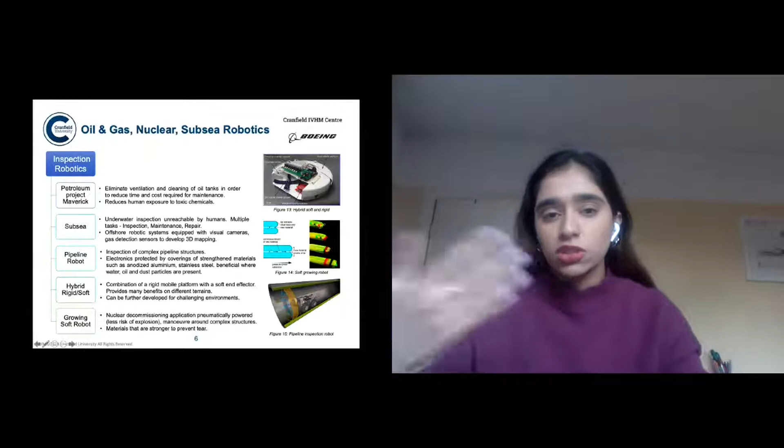So once I had completed this area, I looked more into the oil and gas industry and nuclear decommissioning, who have been developing robotic systems over the past many years. I think they are personally much more advanced when it comes to the application of robotic systems in hazardous confined environments. So I'm just giving some examples.

One of them was the petroleum project, where they had developed a robotic system that was able to be fully submerged in fuel itself, and they wanted to eliminate the process of ventilation of oil tanks and the cleaning process, so much more time is spent on inspection. A similar approach is applied to pipeline robotic systems as well.

One of the most trending topics right now is the use of soft robots, especially in nuclear decommissioning, where they have developed a flexible snake type of robot with the use of soft materials that is able to maneuver itself within confined, hazardous spaces, and because it's pneumatically powered, there's no risk of explosion, for example, because there isn't any sort of electrical components present because of the soft material.

And there have been other examples where robotic systems have been combined together, both rigid and soft, and that are dependent on each other when it comes to conducting inspections.

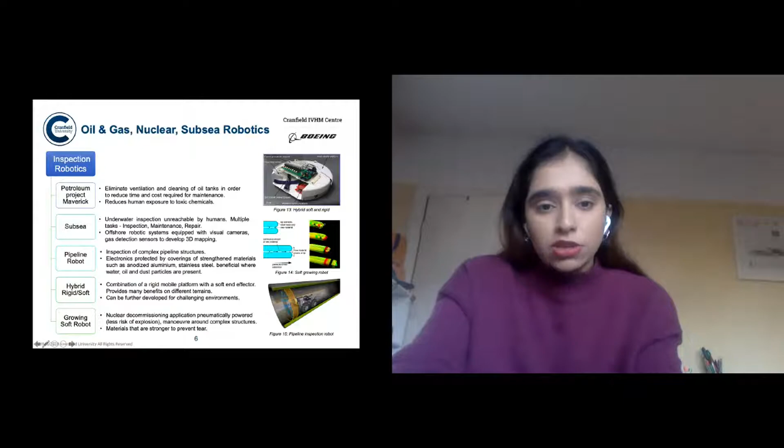So I separated my research into 4 key areas: hazardous environment, confined environment, the materials that would be required when developing a robotic system for a hazardous environment, and the type of inspection methods that you could implement into the robotic system - so either just a visual camera or the use of NDT equipment. With these 4 areas, I broke them down in relation to a fuel tank environment aspect.

So taking into consideration the parameters of jet fuel, which obviously gives off toxic vapor and is prone to explosion, there are different types of limits you have - your lower explosion limit or your flashpoint limit. So how could the electronic side be designed according to this, so there's no risk of explosion, for example? And when focusing on confined space, looking into the physical constraints of the fuel tank.

So how do you design the mobility of a robot to maneuver in a fuel tank itself? And what types of inspection equipment could you add onto the robot so it's quite small in size? It can maneuver in a confined space and conduct any sort of inspection.

And the types of materials. Materials separates into 2 areas. One would be the materials of the robotic system, and the second area would be the materials of the fuel tank, for example. So if it's a composite wing fuel tank, what types of defects would you be looking at?

Corrosion is probably more resistant when it comes to composite fuel tanks, so there may be other impact damages that may need to be detected.

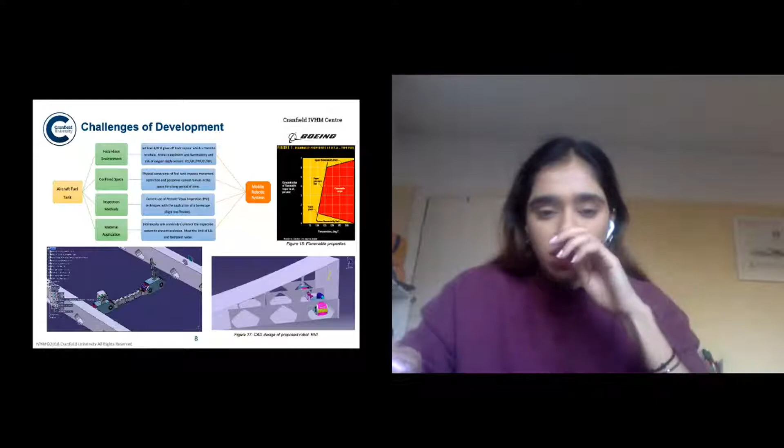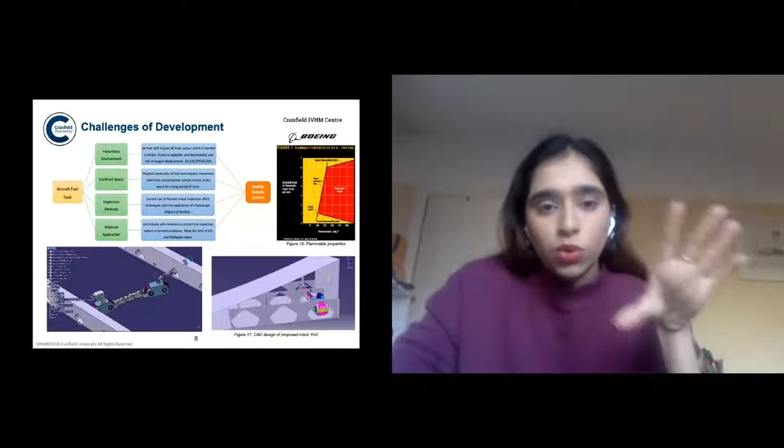So when it comes to the robotic side, I broke it down into two areas. One is the internal inspection, so what type of inspection method would I use? So I'm primarily focusing on just visual inspection.

I think NDT could be incorporated later on for further work, for example. I need to take into consideration the lighting because of the lack of visibility within such a confined space.

And the second area is the robotic system itself, so the types of mechanical components that would be required, sensors. So definitely have, for example, a gas detection sensor because you need to monitor the levels of gases in the fuel tank while it's in there.

And another thing to look into is the failure of the robotic system if it did fail. You wouldn't want a complete autonomous mobile robot in aircraft fuel tank, and if it failed, how would you retrieve it back, and what are the risks?

If the robot system was very small and it failed, how would you retrieve it back? You could simply just apply a tether to kind of overcome this issue.

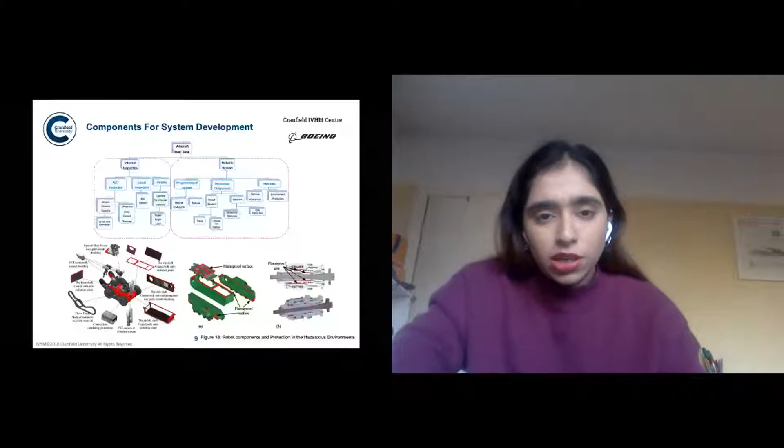So I just want to kind of finish off with the advantages of robotic application within a fuel tank. Obviously the exposure to the person conducting inspection to hazardous fumes is dangerous if it's not done properly. It's a very time-consuming process as well.

So maybe if we did apply a robotic system to such an environment, maybe parameters such as the lower explosion limit and the flash point limit could somehow be adjusted, so they might not have to be set to the same extent as when a human enters the fuel tank. Ventilation is definitely important, but maybe some parameters could be adjusted around the mobile robotic system.

The other benefit would be that disassembly of structures would not be required. You just simply have this robot system that could maneuver in these spaces and conduct inspection.

And flexibility in design. There's so many things you could do with a robotic system - you can add different types of sensors, make it much more advanced, have an autonomous robot system in place. And overall, it would reduce the downtime when it comes to maintenance, so it could be cost effective if implemented in the right way.

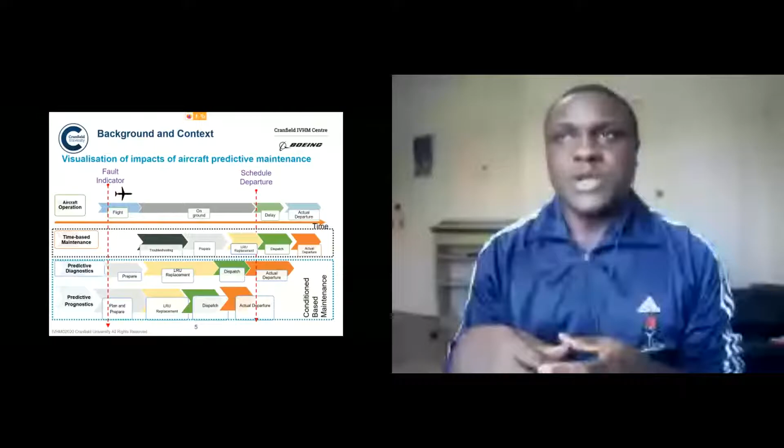Looking at maintenance of aircraft, there's what we call time-based maintenance, which is like corrective maintenance or preventive maintenance. In this type, when the fault is detected during the flight, the aircraft lands, then the engineers will carry out troubleshooting, determine the exact failure, and then the part will be ordered and replaced. We can see that this type of maintenance is prone to delay.

That takes us to what is called condition-based maintenance, in order to avoid such delay. In condition-based maintenance, there's a diagnostics approach whereby the system in the flight operation, if the fault is detected, gives the exact fault, so that when it lands, the aircraft would communicate with the engineer, so that the part will be available and be fixed. In that type of method, we will shorten the delay.

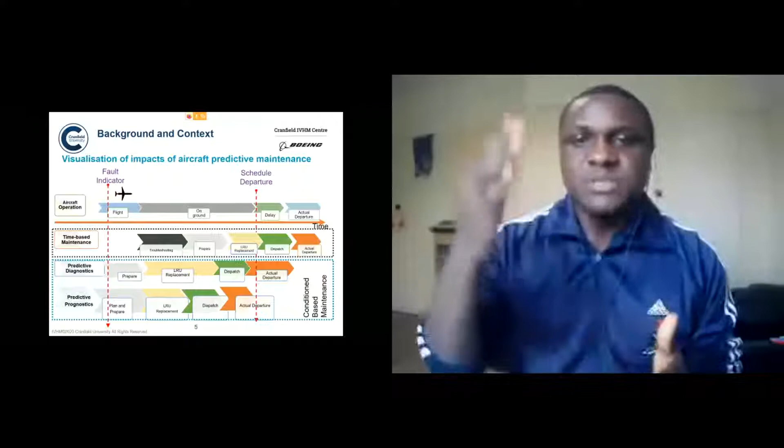But in order to further optimize this, there's what we call predictive maintenance, which will involve running a predictive model to predict this failure before time, so that before the aircraft even takes off from point A, you have already known it will fail in the next phase. So parts will be available, engineers will be ready, and when the aircraft lands, it will be fixed on time. The actual departure time will be the same as scheduled departure, and in that we are cutting the downtime. So this is where we're coming into the predictive model.

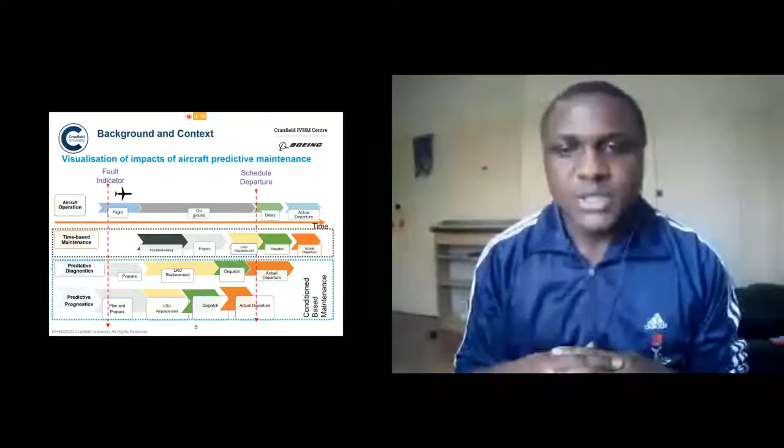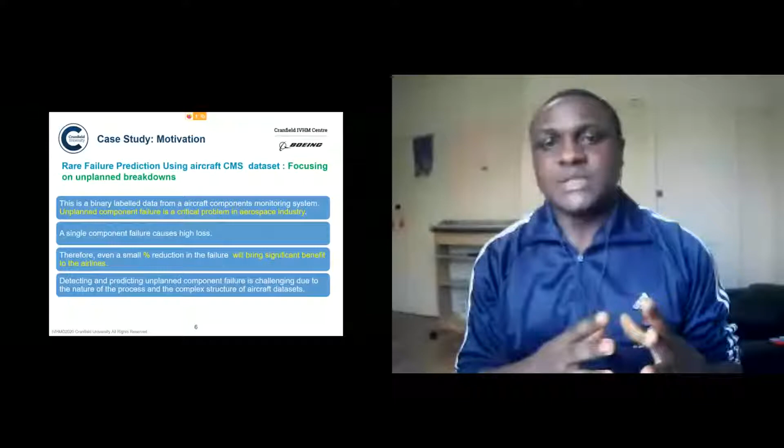In this work, the motivation is we use the data set from the aircraft, known as the central maintenance system data set. It's a data set that gives warning messages or failure messages from different subsystems in the aircraft. In this data set, it's heterogeneous data.

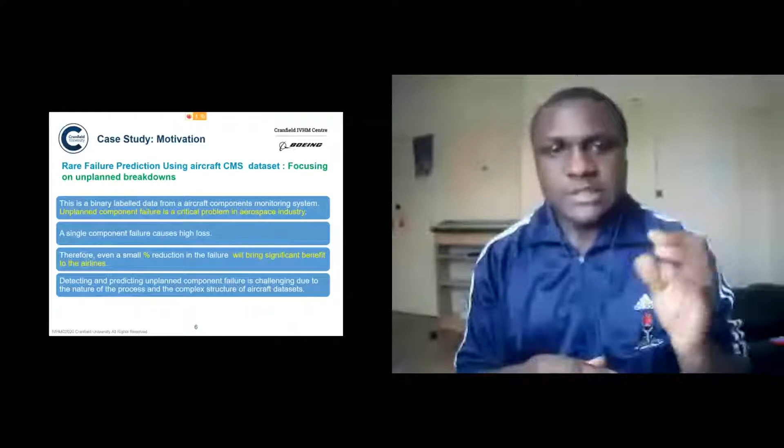It's not just numeric. One thing we target is we target the unplanned breakdowns. In maintenance, we have kind of scheduled time that maintenance is carried out, so there are failures that occur that are not planned. The reason why we focus on this type of failures is because of their importance. Companies are saying that those types of maintenance, though some don't often occur, but if they do, the cost is always high.

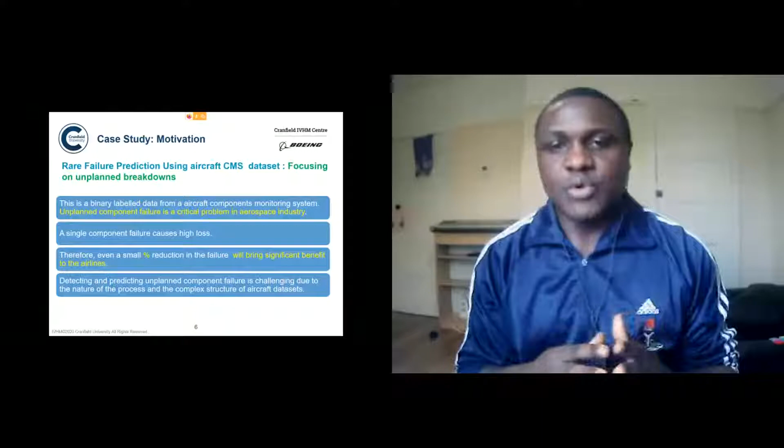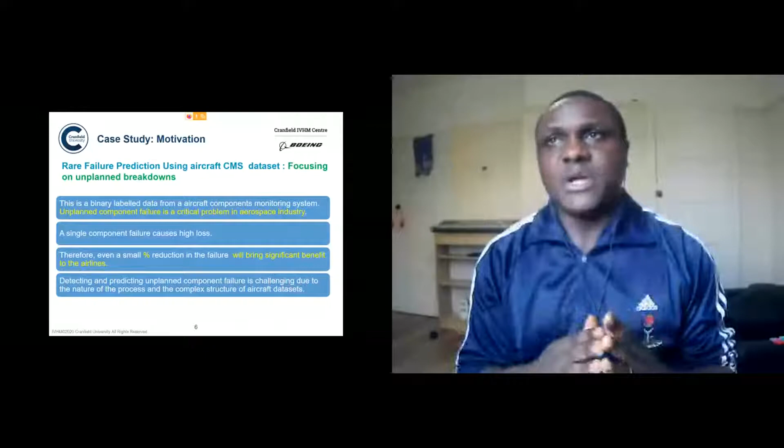So reduction in this type of failure, even to any percentage, will bring significant benefits to airlines. That is why we focus on this. And this type of failure in this data set is rare, there are few of them, and that makes the data highly imbalanced.

I wanted to show you how extreme this imbalance is. A normal imbalance is extreme here. We can see that the positive label, which is related to the unplanned breakdowns, is about 0.001%, while about 99.999% are the failure messages that do not relate to unplanned failures.

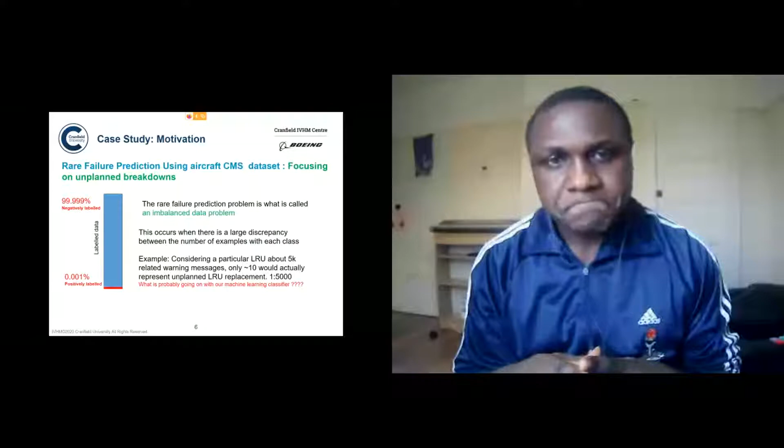Having that problem at hand, we decided to look at different solutions to this imbalance problem. Of course, there are different solutions that exist. We try to put them into three from the literature. There is a data level approach, whereby you try to sample this data set, either oversampling it or downsampling. In that case, they have some drawbacks.

If you are trying to oversample the data, you are adding new data points and altering the structure of the data. If you're trying to downsample it, you may be taking off some information data points. Then there is the algorithm level, where the standard learning algorithm is modified in some way in order to respond favorably to these classes during learning. And there is the hybrid approach, which involves combining one or two or more of these approaches to optimize or gain better performance. So we are actually looking at the hybrid approach.

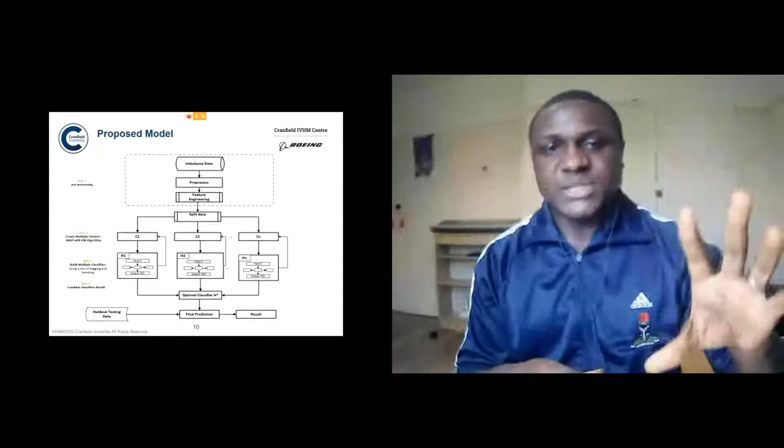Okay, so this is the structure of the proposed method that we implement. First of all, the first step is to pre-process the data. We did our feature engineering, as I've said. So now on the transformed data, we apply the mixed Gaussian process algorithm with EM.

It will cluster this data into different clusters, and then in each cluster we now apply the bagging and boosting method, and at the end, which is step 4, we combine this to get the optimal classifier. So our holdout data set, which is the testing data set, we now use on this classifier, and then we obtain the result. So this is what we implement.

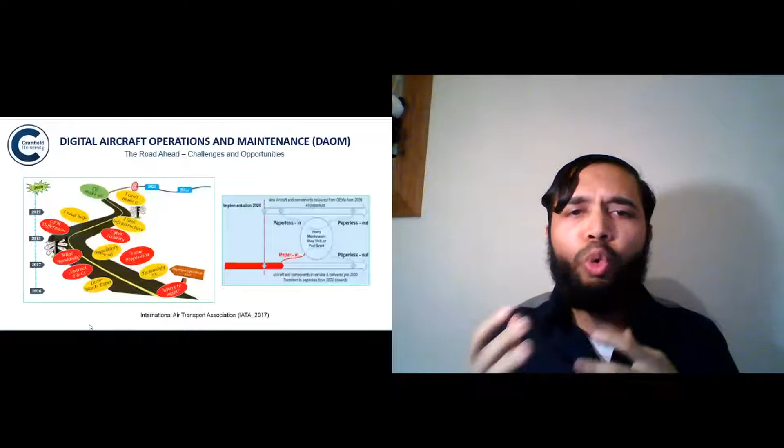In the last decade, there has been a lot of proponents of digital record keeping in the aviation industry. As we know, it's a very strict and complex industry in terms of standards. IATA, one of the big players representing over 80% of airlines in the industry, came up with a guideline on paperless aircraft operations and maintenance. The initial problem was that lessors, who merely own the aircraft and lease them out to airlines, were not sure about moving to digital records, as there were challenges with technology, no regulatory standards in place, and equipment manufacturers were worried about cybersecurity. The entire infrastructure in terms of data systems and interoperability was also a major challenge.

But so far, progress has been made. There have been technologies like RFID and e-signature that have really helped in this process. But going forward, we found out certain challenges that need to be tackled if digital aircraft operations and maintenance is to be achieved in a more effective and efficient way. The most important point in this slide is that all aircraft coming out from 2020 are expected to be paperless and in digital form in terms of records, and all existing aircraft that go into major or heavy maintenance are going to come out paperless from this year. This is a significant leap in the industry in terms of digitization, and that's why understanding the problems and challenges that come with this leap is important.

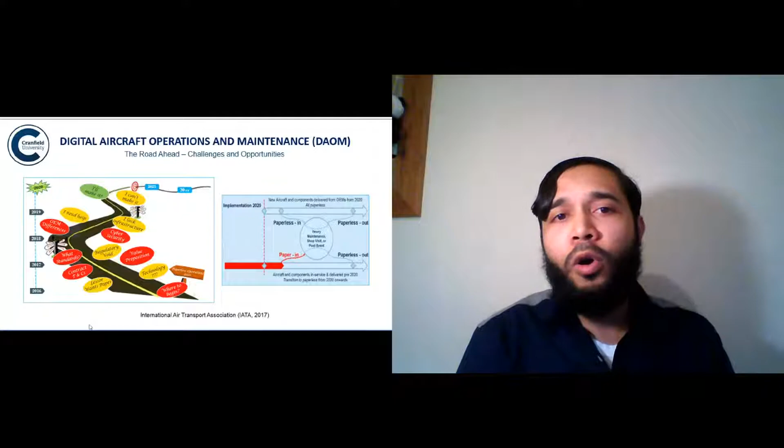From the context of this research, we found out that typically an aircraft will include about 11,000 to 20,000 papers in a year of operation, and this amounts to huge records when it comes to transfer of assets or lease returns.

Generally, an aircraft could cost 2.5 to 4.5 million in terms of actually auditing those records during the transfer, according to the International Bureau of Aviation. Airline aircraft maintenance consists of about 9% of the operational cost, which is about 69 billion. That is huge.

Another important point is that the International Bureau of Aviation came up with a report on challenges of delivery and redelivery, which points to the fact that 60% of the challenges when transferring assets and giving them back is on records. Why records? Because it is mainly on paper, and you have to go through months and months of records with experts to evaluate and audit them.

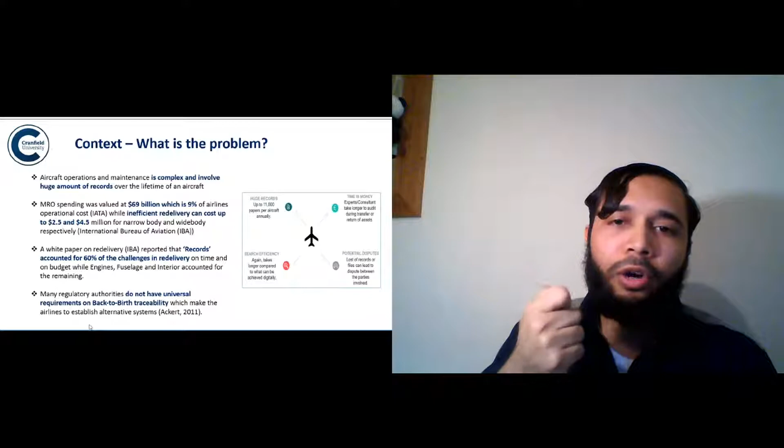Now, if by any chance a record is missing from an airline operator, the stakeholder, the lessor, or any of the MROs, it means that component, or the aircraft itself, decreases in value or is even not useful at all, because back-to-birth traceability cannot be established and nobody knows what happened between that period. That's why digital records are important.

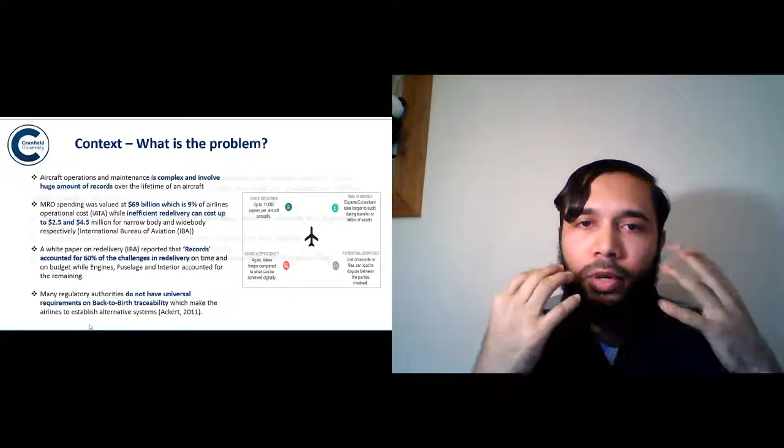There's another report from Cambridge that looks at the information perspective, the technology perspective, and four recommendations came out of it. Two of these are very critical in terms of information record keeping. The first is interoperability, which requires semantic software and cognitive systems, which I will discuss in depth throughout this paper. Secondly, is the development of frameworks and standards for data interoperability.

So again, we see the idea of data interoperability and heterogeneous data comes up a lot in the literature, a lot from the industry, talking about how this challenge affects the industry.

We have outlined four main challenges that we found to be critical in the development of digital aircraft operations and maintenance. The first one is the establishment of common regulatory standards. This has to do with the various standards that exist from different authorities, for example EASA in Europe, or other authorities in Asia or Africa. There are so many different standards, and when you lease your aircraft to different jurisdictions, it means different kinds of records and formats, and that's a huge challenge.

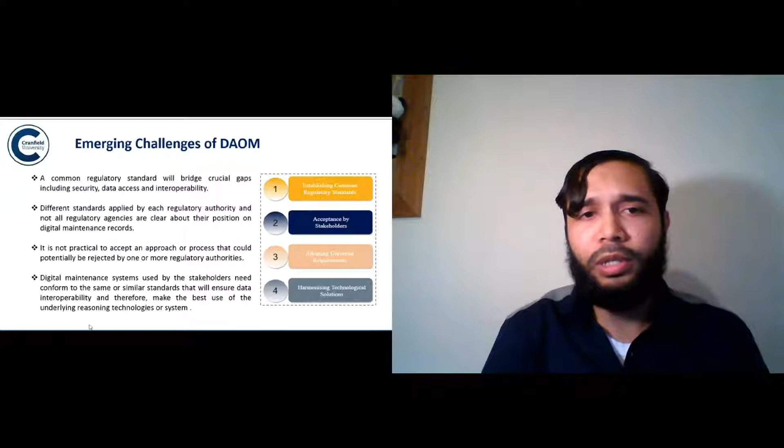The first one is aviation safety management, where they look at inaccurate record keeping and insufficient integration of safety data. What they did was develop an ontology, and then an ontology-based information system from that in order to improve integration of data. They presented how they developed and evaluated it, giving an idea of the kind of work that can be achieved.

Secondly, is ontology-based knowledge management in the area of aircraft engineering. This really looked into the organizational perspective, where the knowledge of expert engineers is transferred to new engineers.

So that's more from IT, from an organizational perspective.

Thirdly is the avionics. In terms of avionics, the kind of work that has been done is trying to conceptualize the knowledge of the avionics domain, understand how and why failures occur, and what their consequences are. They developed an ontology based on reuse and alignment, meaning they use existing ontologies in that field, and then try to associate cause and effect of the failure in that area.

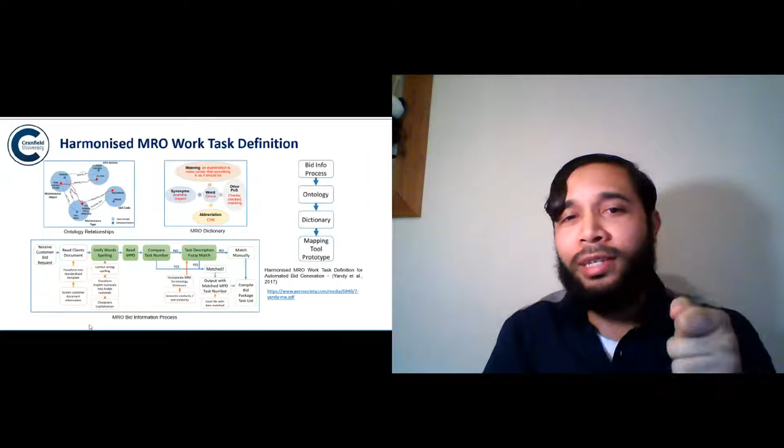When they developed this ontology, they used incoming customer bidding to try to map it with the existing database and the ontology, then compared it to find out what task done previously matches the current bidding. This saves them time from going manually through all previous work in order to compare the task and give out accurate bidding that could be accepted by the client.

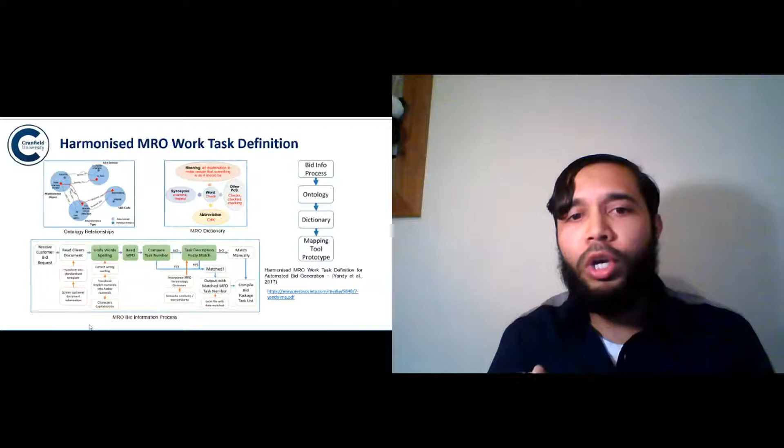So they use fuzzy matching combined with their ontology, and developed a mapping tool able to predict or derive output from their records, the maintenance planning document and task number, to get customer bidding more efficiently and accurately.

Now, in the context of maintenance record keeping, there are three components. First is the aircraft maintenance manual, where equipment manufacturers detail how the work can be done. In that manual there is also the task card, which references each part of the aircraft, what task should be done, who does it, and the materials or consumables involved.

So what we're seeing is the need for a higher level of knowledge representation if you want to develop a system that doesn't only look at data structure, but also looks at the relationship and semantics of that information, in order to understand the knowledge coming from similar systems within the industry.

If you use two different systems over a long period, you could integrate those details. Here is one of the records we are reviewing from the aircraft technical report given to the university. In this case, we were using the records of the 737 available at the university.

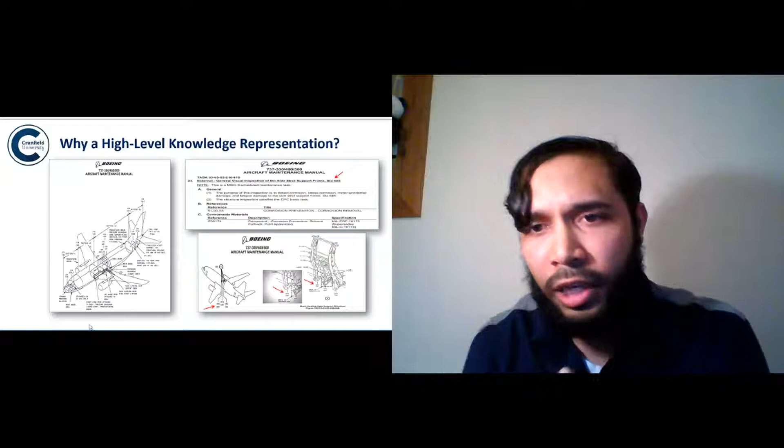So what we're seeing is that if you have an ontology, it can reference back to that maintenance task, and can even know what was done, what consumables were involved, and so on. You can infer a lot of information and find gaps between maintenance records.

When all this is recorded automatically with a system that has good relevant information structure and conceptualization, you can understand and build a lot of reasoning on that. That's why we presented the idea of an ontology model consisting of four main categories — the most essential or critical aspects of aircraft maintenance keeping that we found.

The first is the aircraft structure, which includes the ATA chapters of the aircraft — for example, the fuselage, the APU, the engine, and so on. Then there are the maintenance tasks, which detail what job needs to be done, who does it, and the consumables. And then there's maintenance personnel, like the technical report that we have seen.

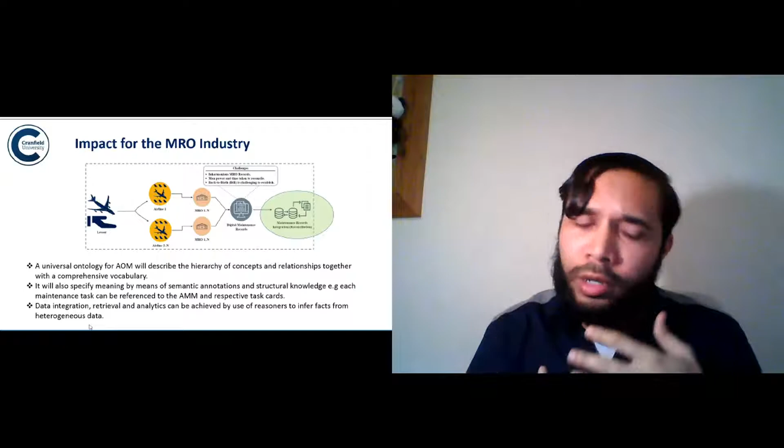And also an ontology comes with terminologies, comes with a dictionary that is very useful in terms of knowledge reuse and sharing. However, in the current perspective, knowledge sharing and reuse is not considered, and also data integration is currently not considered, so it has to be done manually.

Finally, this is the final slide. We see that the digital IT systems we have today are a means, not an end, towards achieving digitalization, and therefore there is a need for a more robust alternative in terms of digitizing information from those systems. Here are some of the further challenges we see going forward. Thank you very much, and I look forward to any contribution or questions, please.

Any question from the audience? Okay, so let me ask you a question, Abdullah.

So you have proposed a universal framework, which looks very ambitious, actually. As you are doing your research, are you going to focus on a specific use case? Because you can convert all guidance catalogs and manuals into your ontology. Yes, this is very, very important. And the idea of the aircraft maintenance manual itself is so huge and cannot be covered in three years, to be honest.

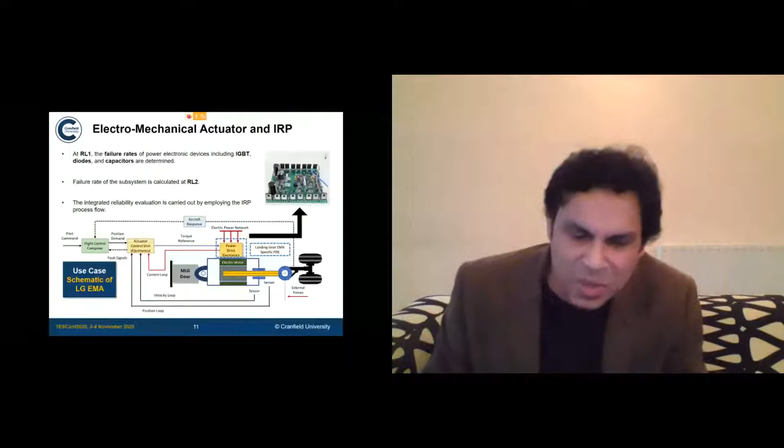So as we apply the IRP process at the RL1, the failure rates of the power electronic devices, including IGBTs, diodes, and capacitors, are determined using the parametric values of voltage, current, and power, as well as the temperature obtained during various conditions of EMA while landing, taxiing, and takeoff phases of the aircraft.

We also factored in the dynamic disturbances that present mechanical shocks to PDE and cycled them over a period of 100 hours.

Accordingly, we employed the minimal cut set scheme, defining the minimal cut set for the load points - in this case, the EMA on the left wheel and the EMA on the right wheel of the EMA system. Based on the reliability level 1 and 2, and the integrated system grounds, the integrated reliability evaluation was carried out by employing the IRP process.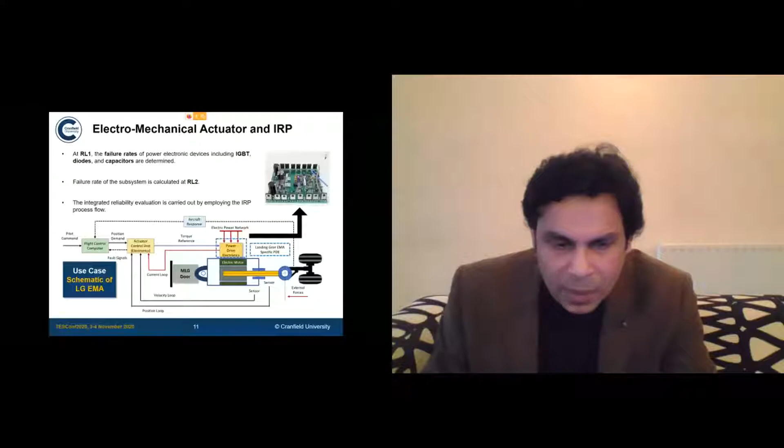Coming to some results, the sensitivity analysis of failure rate of IGBTs and its impact on the reliability of electromechanical actuator is shown here. As is evident from this graph, the higher the failure rate of IGBT, the lower the system reliability. This is in correlation with the thermal cycling the IGBTs were exposed to, implying that higher junction temperature tends to increase the degradation in IGBT reliability and subsequent performance, which may result in the overall EMA performance degradation and reduced reliability.

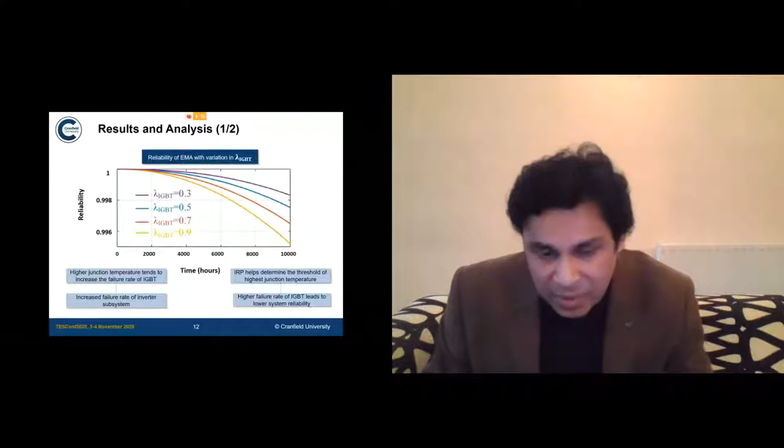Comparing the cumulative reliability with respect to EMA approximate left wheel and EMA approximate right wheel of landing gear, we can see that they both maintain high reliability equal to or greater than 0.9991 even after 10,000 flight hours. This includes the taxiing, takeoff, cruising, and landing phases, with stresses more prominent during the landing and takeoff phases. This implies that the differences in reliability of power drive electronics which serve the EMAs are not significant.

Resultantly, both can be implemented in any architecture considering their high reliability. This forms the crux of proposing this framework that can be exploited to determine safe implementation in MEA architecture. Next slide, please.

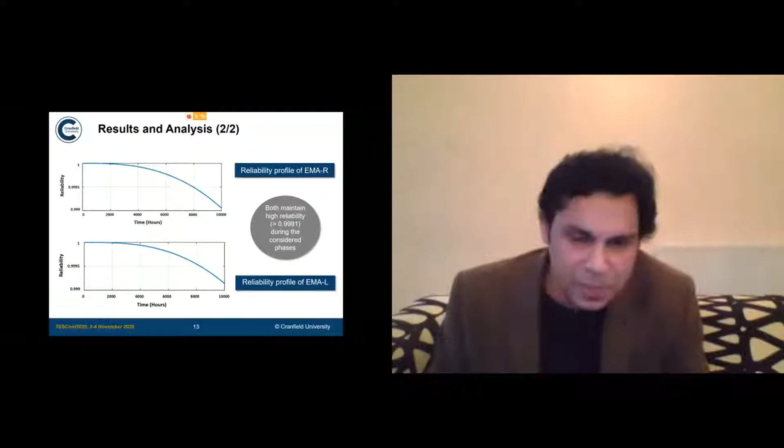With one minute I have left, I come to the end of my presentation with certain key takeaways.

First and foremost, the optimal MEA operation places an increased demand on assuring availability of highly reliable power semiconductor devices - to be more precise, the power drive electronics in this case.

This can be made possible with integrated reliability development that enables an optimized reliability assessment from device to the system level. The factoring in of highly representative system mission operating conditions is key.

to exploiting IRP for optimal thermal and power management so as to enhance the reliability of power devices and various topologies they build. Last but most importantly, it provides a framework that facilitates environmental optimization, designing and implementing redundancy, and improving preventative maintenance strategies related to MEA or all electric power systems in future.

So with this, I come to the end of my presentation. If you have any questions, go ahead.

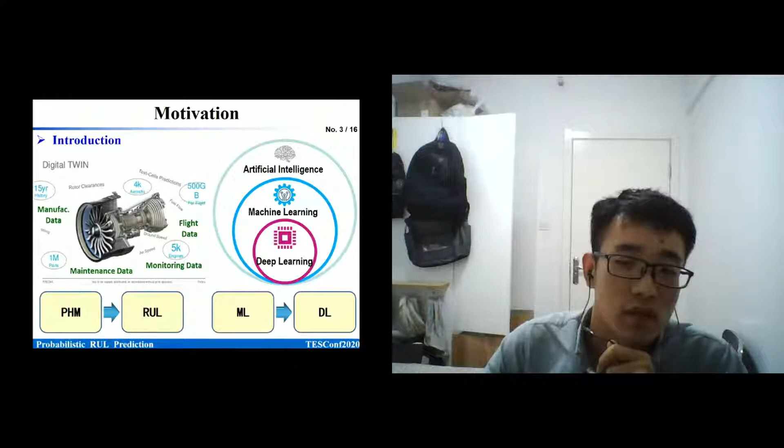Modern big data techniques has led to the popularity of prognostic and health management, both in the research community and within industry. One important ingredient of PHM is remaining useful life prediction, that is the estimate of how long a system or machine may continue to operate unhindered. Given the complexity of modern industrial systems and the quantity of associated monitoring data, data-driven model-based methods based on machine learning have shown successful results.

In RUL prediction, traditional machine learning algorithms need handcrafted features as their inputs, which limits the performance improvement in the big data era. Thus, deep learning, which allows automatic feature extraction without extra domain knowledge, has become one of the most promising data-driven model-based approaches.

However, most of these deep learning models only provide a point estimation of the RUL, which means that the prediction uncertainty is often ignored.

The quantification of the prediction uncertainty is important for assisting decision-making, including identifying alternatives in PHM systems. Without prediction uncertainty, it would be impossible for decision makers to quantify the trustworthiness of deep learning model results.

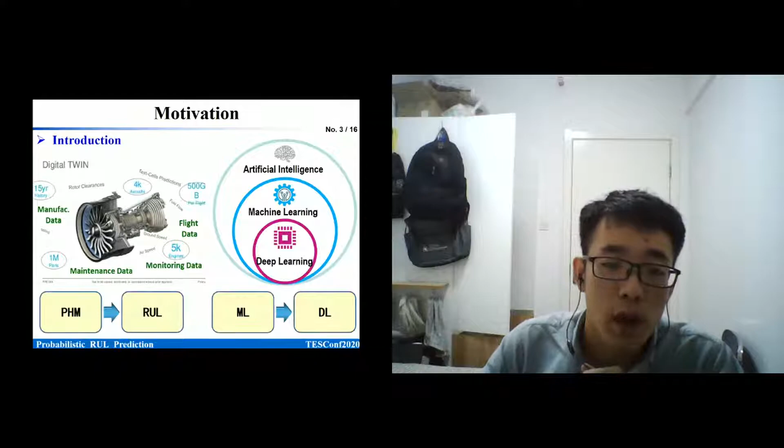The uncertainty mainly contains two parts: epistemic uncertainty and aleatoric uncertainty. Epistemic uncertainty is the model uncertainty introduced by the representation capability of models, and many scholars introduced the Bayesian deep learning framework to model this uncertainty.

Thus, in this work, we aim to simplify the process of aleatoric uncertainty quantification and provide a probabilistic RUL prediction framework with flexibility to work with existing deep learning models.

The next part is the methodology. We first review the point estimation method and then introduce the probabilistic RUL.

Mathematically, the real RUL yt at the time stamp t can be expressed as the true RUL plus additional noise, where the mapping function f denotes a representation function with input data xt and parameters theta. Given the training samples, the parameters theta can be estimated by minimizing the mean square error loss function when the noise follows the same Gaussian distribution at all time steps.

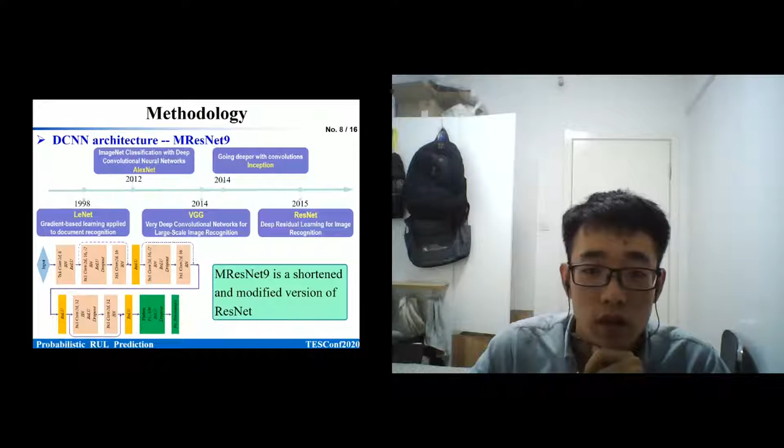The next part is the experimental verification.

The C-MAPSS dataset is a turbofan engine degradation simulation dataset generated by C-MAPSS, a suitable platform that can record measurements from different sensors corresponding to predefined health-related parameters. This dataset consists of 4 different subdatasets simulated under different compositions of working conditions and 2 fault modes. A total of 21 sensor measurements are collected in each subdataset, including a fleet of engines.

In this work, we choose FD001 and FD003, with the same condition and different fault modes, to verify the performance of our constructed probabilistic RUL prediction framework.

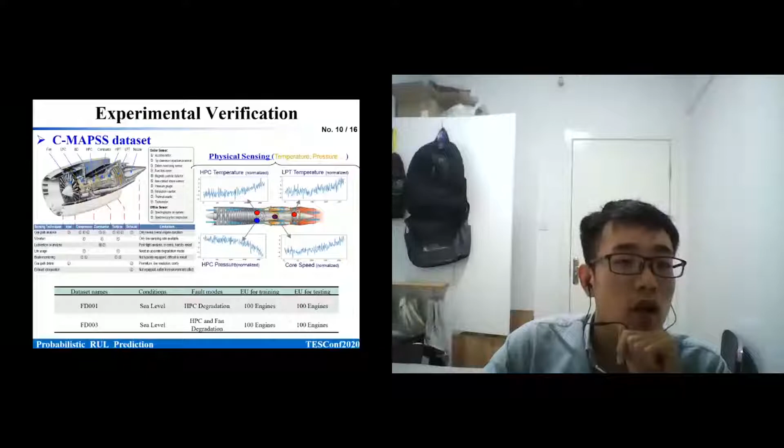Thus, we drop any measurement whose variance was smaller than a constant threshold. The second part is normalization. For the stability of model training and testing, each sensor measurement is normalized using 0 to 1 normalization.

The third part is sample generation. In this work, we set the window length equal to 30. Thus, the dimension of each training sample was 1 times 30 times 14, which represents an input channel, window length, and the sensor number respectively.

The final part is the RUL prediction. The training dataset is used to train the neural network, and the trained network is further used to predict the point estimation and the confidence interval of the RUL.

From the experimental results, we can observe that the probabilistic RUL prediction framework can achieve considerable results, and even higher accuracies than the point estimation. Performance of the parametric distribution estimate is similar to the non-parametric method. This may be because the true prediction uncertainty obeys a Gaussian distribution to a certain extent.

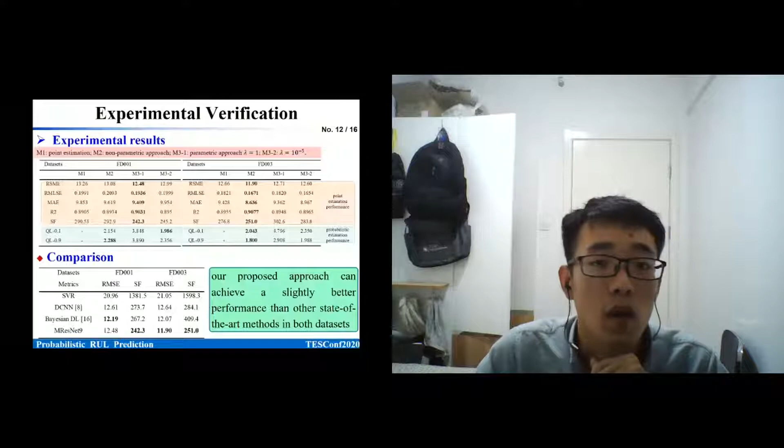decreasing uncertainty over the cycle, which is very useful for the RUL prediction in practice, as the shorter RUL is associated with higher risk. When the trade-off parameter lambda of the parametric approach is too large, the learning procedure will pay more attention to the variance decay term.

This means that the model would prefer to output a relatively small variance. From the perspective of probability, a large lambda means we assume a strong prior on variance in the loss function, which might distort the assumed parametric distribution.

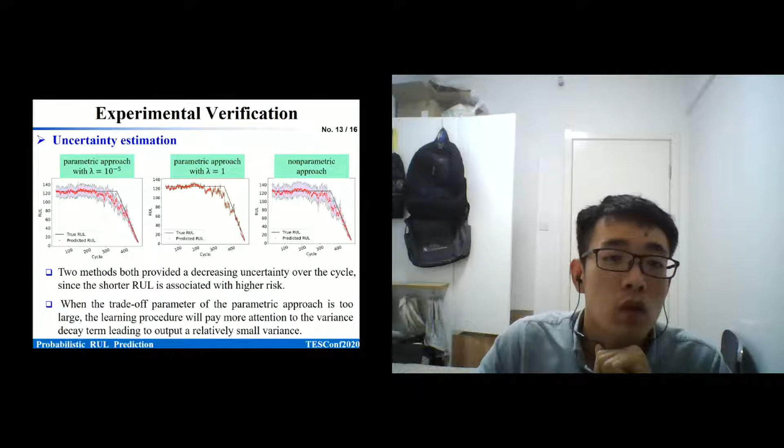It comes to the conclusion. We construct a probabilistic RUL prediction framework using parametric and non-parametric approaches to estimate the probability density of the target outputs based on a DCNN model. Our proposed framework can provide not only a point estimate of the RUL, but also the associated confidence interval of the RUL prediction. One public available dataset was used to verify the performance of our solution, via comparison with other state-of-the-art methods.

Thanks for all your listening. The source code will be released at the GitHub page.